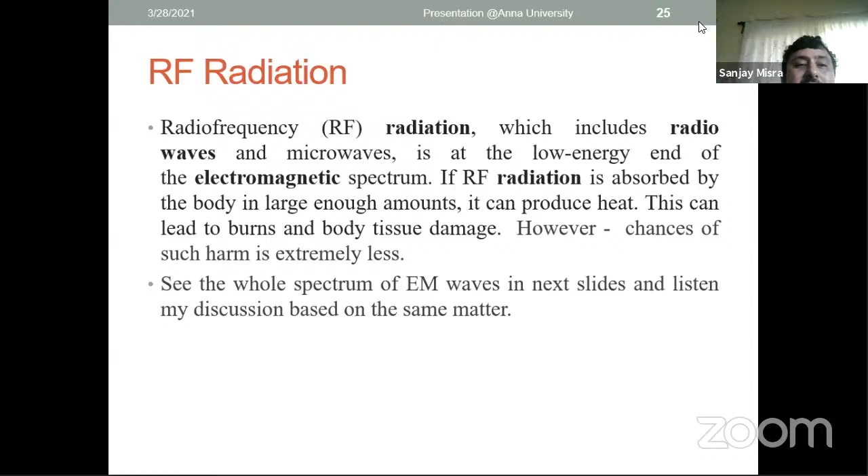How is it so? I'm going to prove it. See the whole spectrum of electromagnetic waves in the next slide. This is the electromagnetic spectrum. If you see, at the extreme end is the radio wave.

So we are talking about where 5G is, between radio and microwave. The wavelength in centimeters is going to get very small towards the microwave, which is about 1 centimeter. In fact, 5G works up to 10 millimeters. Infrared is 10 to the power minus 2, visible is 10 to the power minus 5.

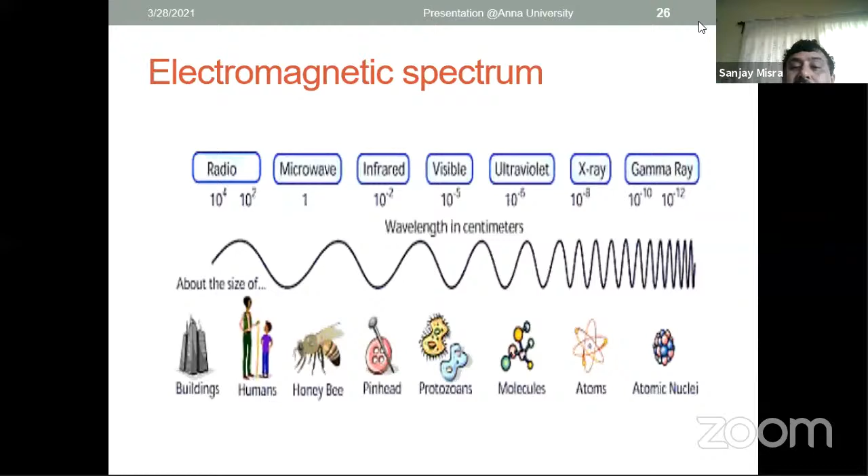Up to the microwave, these become more and more dangerous for health. Radio waves can cross buildings and humans. Microwaves are comparable to the size of a honeybee, about 1 centimeter. Infrared is like a pinhead, and then visible light corresponds to molecules, atoms, and atomic nuclei. Gamma rays are going further in that direction.

So there's a term: the non-ionizing nature of radio waves. The radio wave band used for mobile phone networks is non-ionizing, which means it lacks sufficient energy to break apart DNA and cause cellular damage. This is from a BBC report, 2019.

Higher up the electromagnetic spectrum, well beyond these frequencies, there are clear health risks from extended exposure. The sun's ultraviolet rays fall within the harmful category and can lead to skin cancer. This is a major point.

I'll show you some more slides and it will be clearer. Actually, the sun doesn't only produce infrared, but also visible light and ultraviolet light. Fusion in its core gives off high energy gamma rays. By the time they reach the surface, their frequencies mostly fall only within the infrared, visible, or ultraviolet spectrum.

During solar flares, the sun also emits X-rays. That's why it's highly recommended not to directly look at sunlight during a solar eclipse.

So how does this connect with 5G and radio waves? There is a strict advisory limit for exposure to even higher energy radiation levels, such as medical X-rays and gamma rays. When I was a child, my father used to come to the hospital and always tell me not to go to the X-ray room.

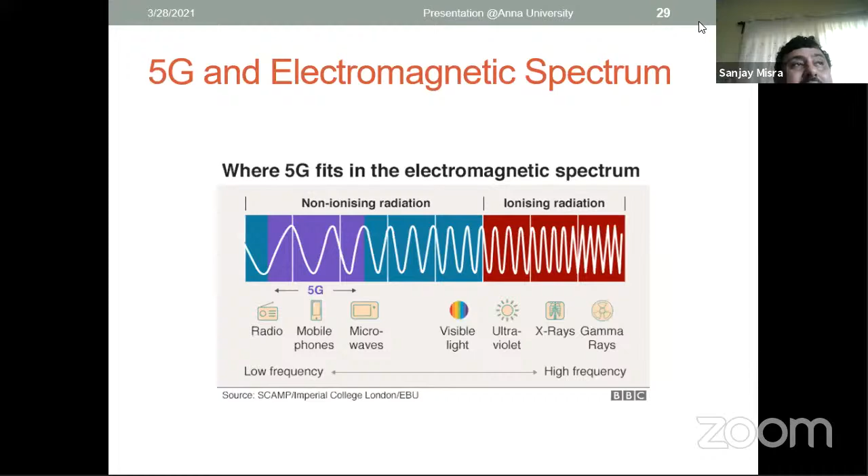From lower frequency to this frequency, you can see 5G is only from radio waves to microwaves. So it's very clear that 5G is in the non-ionizing radiation range. The point is that even sunlight emits up to X-rays, and sometimes gamma rays, and we are all facing sunlight every day in everyday life.

They are not harming. It is true that up until they reach the surface, this frequency, this strength is going to be very low, but still those contents are there.

5G utilizes millimeter wave technology, roughly 1 to 10 mm. These millimeter waves exist on an extremely high frequency, and are called millimeter waves because the wavelength ranges between 1 to 10 millimeters. 5G may also utilize ultra high frequency radio waves, which relate through the same wavelength and frequency formula, between 300 megahertz to 3 gigahertz.

Radio frequencies from navigational transmissions, AM, FM radio broadcast, television, cordless and mobile phones, microwave ovens, satellite uplinks, microwave relays, and radars all operate within the range of 3 kilohertz to 300 gigahertz. So theoretically, these frequencies do not carry enough energy to exert biological damage.

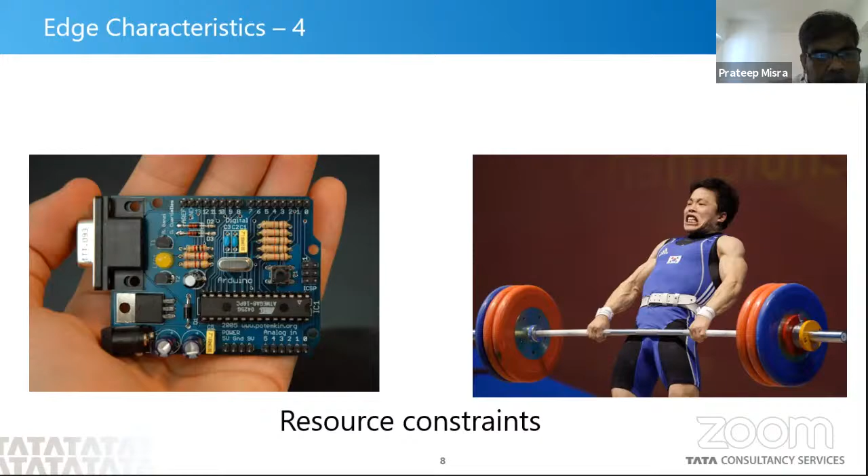So in the IoT edge, we really have certain goals. We need to meet latency requirements, because the applications demand it. There is a huge integration challenge. In fact, for companies like ours, when we work in IoT, one of the biggest challenges for us is to integrate systems - integrate different kinds of assets to other assets, as well as to other backend IT systems.

There is huge heterogeneity in terms of the networks, the structure of the data that is exchanged, the semantics of the data, the networking protocol itself. There is so much heterogeneity, we spend disproportionate amount of time in integration, and therefore standardization is very important.

We also need to optimize on data volume and network traffic, how much to exchange, whether to do more computation on the edge or to the cloud, or how much data to exchange. All of this has to be optimized based on the project objective.

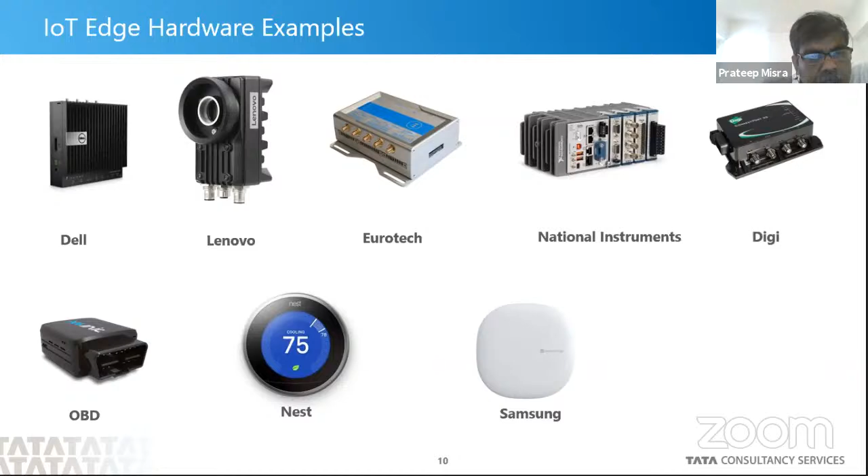Again, inside those IoT edge devices, you have these kind of boards, like this Arduino or this Raspberry Pi. These are examples, of course, for prototyping, but finally you make a production system out of these things. These days, IoT edge devices are also coming with specialized hardware accelerators for deep learning and machine learning. For example, this device from NVIDIA Jetson contains accelerators for machine learning inferencing and production, where models are executed on IoT edge devices.

So these are again some specialized devices for automotive, etc. These are all examples of the systems that are there inside those packaged things which we saw earlier.

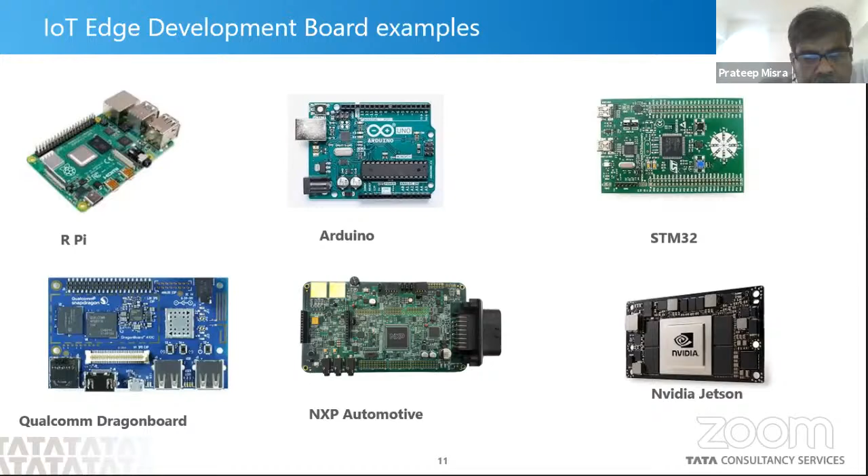So what does the IoT software stack look like? Of course they are computers - an IoT edge device is a computer. It will have its hardware, device drivers. Very important is to have the right kind of hardware abstraction or board support layer. In fact, whenever one of these boards comes out, we need to ensure that the hardware abstraction layer is there so that the device drivers can work.

And on top of this board support package or hardware abstraction layer, we have operating systems. These days it is extremely common to have Linux as an operating system. In fact, there are specialized operating systems for each domain - Linux Foundation, for example, is coming out with automotive grade Linux, which is specialized for automotive systems.

We can, of course, have other operating systems also. In microcontroller based systems, you can have more real-time operating systems like FreeRTOS, etc. Sometimes you don't have operating systems at all, but these days, more often than not, we have some kind of operating system. And then on top of that, we have these IoT edge platforms.

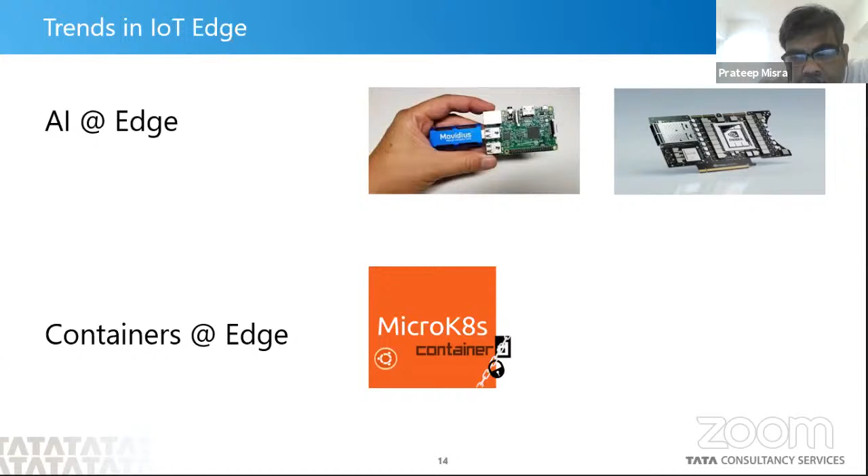Models are built in the cloud, those models are transmitted to the IoT edge devices, and then those AI models are executed at the edge. We have a deep focus on all aspects of this within TCS and TCUP Edge. The other thing is that containerized applications are being packaged as containers and run on container orchestration systems at the edge, things like micro Kubernetes, again a popular container for the edge. These are something we have also adopted.

The other thing happening is that there is a continuum, because of technologies like software-defined networks and service meshes, we can actually very seamlessly just focus on service development, whether it is an edge service, fog, or core. On the data and control plane part of the service mesh, these are all freely interchangeable, usable, and pluggable. So there's a continuous continuum between the edge, the fog, and the cloud. These are some of the trends, and there's a lot of work happening in all these areas in organizations like Linux Foundation and the Cloud Native Computing Foundation, etc. So everything is, the boundaries are actually getting blurred - the edge, fog, and core, etc.

So that was an introduction to IoT Edge in general. Very quickly, I'll also tell you about TCUP Edge. TCUP, or TCS Connected Universe Platform, is a complete enterprise-grade end-to-end IoT platform, and we provide various services required in developing IoT applications. We package them in the form we call microservices, and we expose them as application programming interfaces. Application developers use our APIs to develop these applications. We have a specialized platform for the edge called TCUP Edge, which is designed ground up considering the edge characteristics.

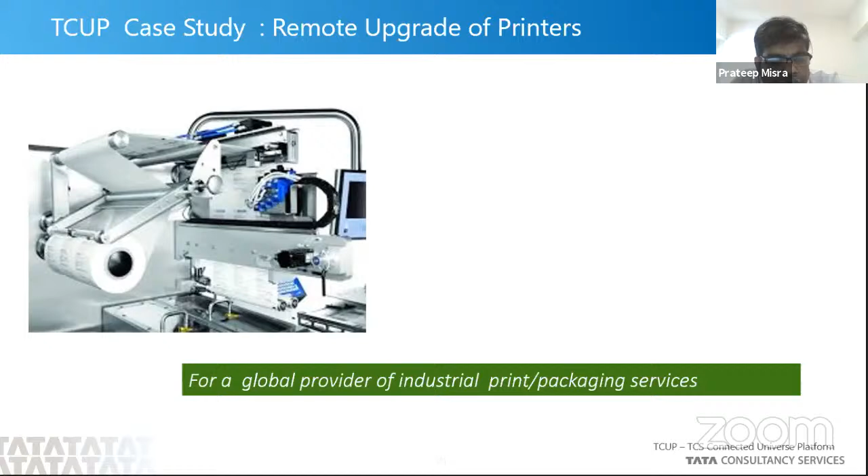In smart factory applications, this involves collecting data from control systems at the edge, running some data pre-processing at the edge, and then sending that to the cloud for cloud-related processing. This was done in a factory of a precision engineering component company.

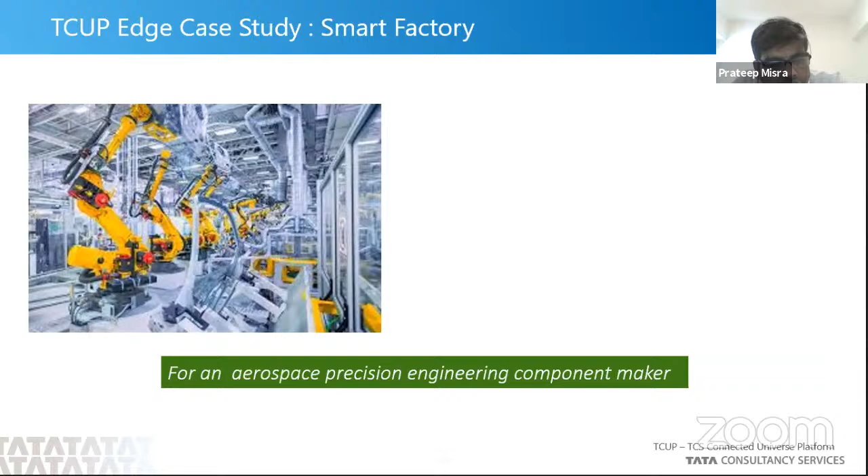Similarly, for large steel manufacturing, raw material inspection is done using image processing techniques where we try to detect impurities in the incoming material. Whenever those impurities are detected, we generate alerts.

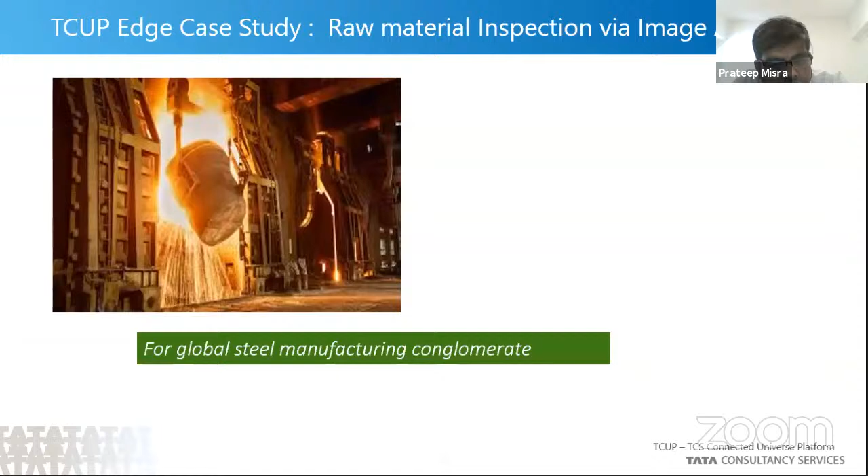Another area where we now have a big focus is laboratory IoT. Most pharma, chemicals, and formulations companies have significant investments in labs, whether product engineering labs or production/manufacturing labs. There are many very expensive, high-end assets in these labs that need to be monitored like any other IoT asset tracking application, but these assets also generate a lot of data.

So integrating all these systems, processing and harmonizing the data, transporting it into the cloud, and maintaining the data lake on the cloud side - these are the kinds of engagements very much in demand these days. We see a huge interest in the industry for laboratory IoT, and our edge platform is being used by many customers for laboratory applications. I'll end my talk here.

I hope I was able to give you a flavor of what's happening in the industry and what kind of engagements and technologies we are involved in. I hope I finished in time, and maybe I have a few minutes for question and answers.

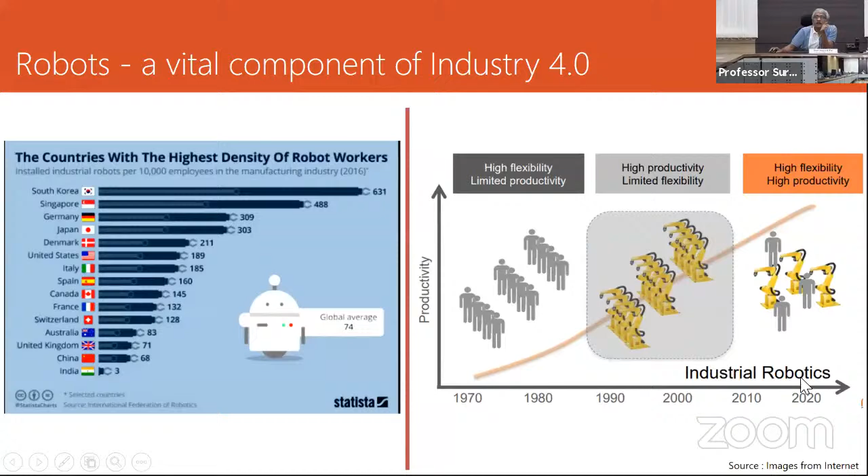As of now, in most cases wherever robotics are used, it is either in manual mode or a highly programmed situation, meaning it's programmed to do a repetitive job. So it is not accustomed to tackle dynamic situations, meaning no intelligence is involved. Even though there is no human intervention, the intelligence is very limited to the activity or program mandated to the robot, even though it produces very high productivity.

But because of these dynamic situations, we need to understand how these robots in place in industry can be collaborative with human beings, so that a flexible system can come up. Robots can operate in dynamic situations so that we get a smart product. So even though robots are in place, our actual vision under Industry 4.0 or Industrial Internet of Things is that the collaborative nature of robots must be there in the software, meaning robot-human interaction has to be there to bring flexibility.

I'm giving an example of this work: how can a robot avoid a dynamic obstacle. If a robot is asked to pick up a job from one place and move it to another place depending on industrial need, and during its path some obstacle comes up, how can that be solved? People are working on that, and in fact my group is also working in this field.

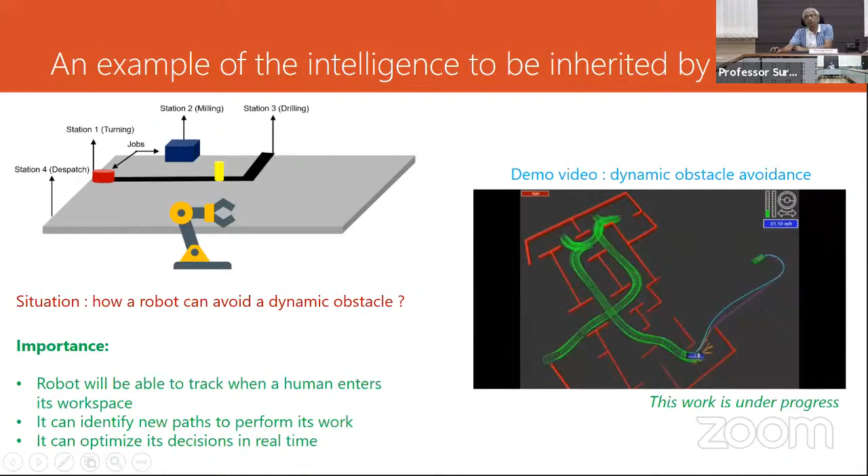These sort of situations would be very much needed when we would like to place robots to work in dynamic situations, or where robots have to work with human beings. If the operator comes up, the robot has to find out whether the operator is obstructing its path or not. If it is, then it needs to find an optimized, shortest route. This is an example which we are planning to implement in the robotic facility, and we have successfully done the simulation.

So IoT applications in manufacturing, we understand mainly in four aspects. If you look carefully into these four aspects, you will get to know that the majority of manufacturing applications that are really concerning us today fall into these four categories.

The first is real-time product quality analysis. Dr. Misra has told us that image processing plays an important role in identifying product quality on the shop floor. Similarly, we need to understand the health of the equipment producing a job, and how long it can serve. So the digital version of health, which we call the digital twin, has to be in place so that we can know how long the machine will work. Not only that, if a machine is working and suffering from some problem, then the operating parameters also need to be optimized depending on the instant health of the machine itself, meaning the dynamic nature comes into play.

There are a lot of applications where remote operations come into picture, like the operator sitting at one place and the machine at another. The operator cannot go beside the machine for some reason. So how can the machine be operated, while ensuring safety for both the operator and the machine? All these factors are to be studied through implementation of each needed module of Industry 4.0 that I have mentioned.

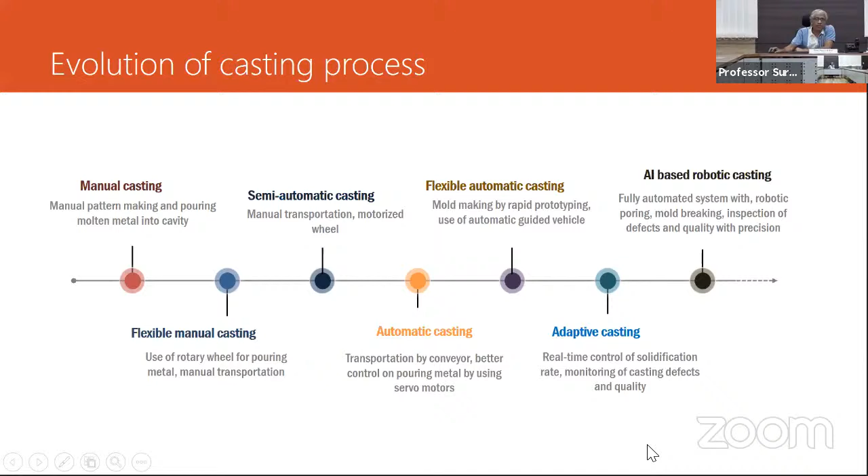So I'm giving an example, like in the cladding process. If you can measure the glow of the molten pool and capture this image, then the characteristics of that image can be very easily used to monitor the cladding quality.

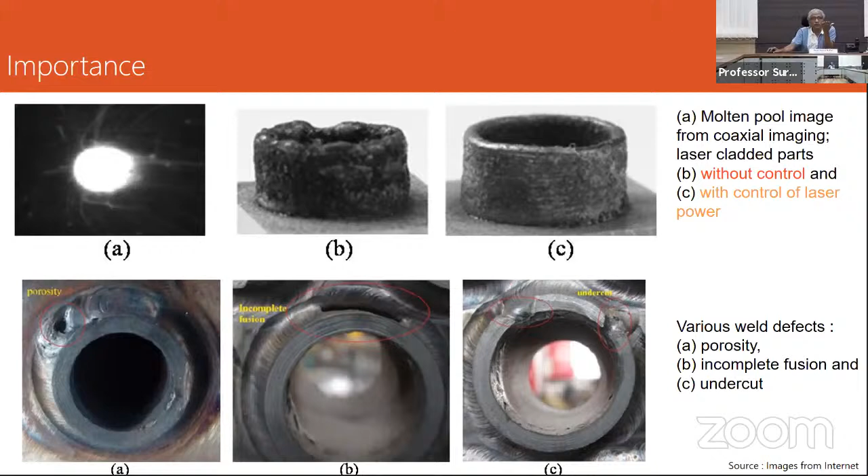As Dr. Misra has rightly mentioned, image processing has huge, immense applications, and still we need to travel a long distance to ultimately come up with the product or software which can be readily used in the industry.

Another example is the machine vision systems for quality inspections. The previous one is real-time process control, and this is to avoid rejection of the product at the quality stage. For most industries, it's very difficult to judge each and every product on the shop floor in real time.

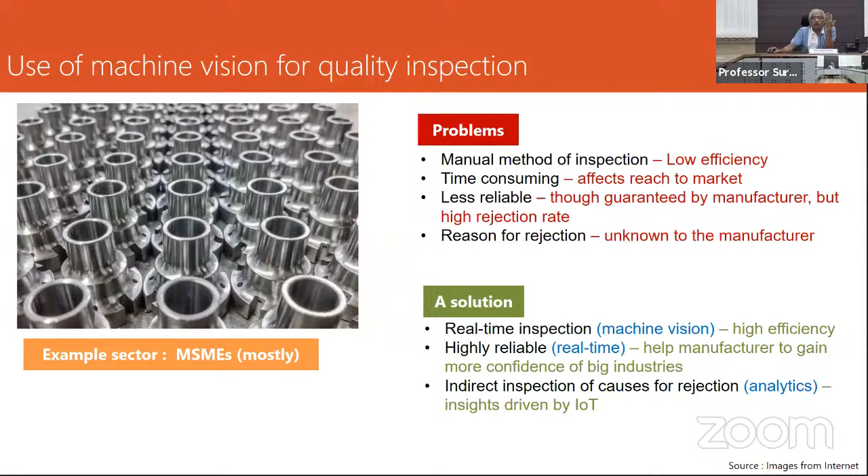So here we have come up with image processing based solutions which can be very easily implemented for real-time inspections, so that it can avoid the rejection of the product and also ensure the quality.

I'm giving quite a few examples to show how potential the image processing technique is for quality inspections. The circuit board or motherboard has a lot of components of different numbers, sizes and types. If something happens, it's very difficult for a person, even for experts, to actually pinpoint the fault.

Similarly, image processing can be used for automobiles, for example to check the distance between the two electrodes in the spark plug.

This is an example we have done in the case of wheel beam inspections for automobiles. We captured the image using a low-cost webcam, thinking of small and medium enterprise manufacturing applications, and then applied AI-based techniques.

So after several iterations, we came up with enhanced quality, which is almost at par with the image taken by a good quality camera. The lower image is the one taken by the good quality camera.

So if you see this, you can see how much potential artificial intelligence has to augment image quality, which then helps in processing, and finally gives the product quality with 99% accuracy.

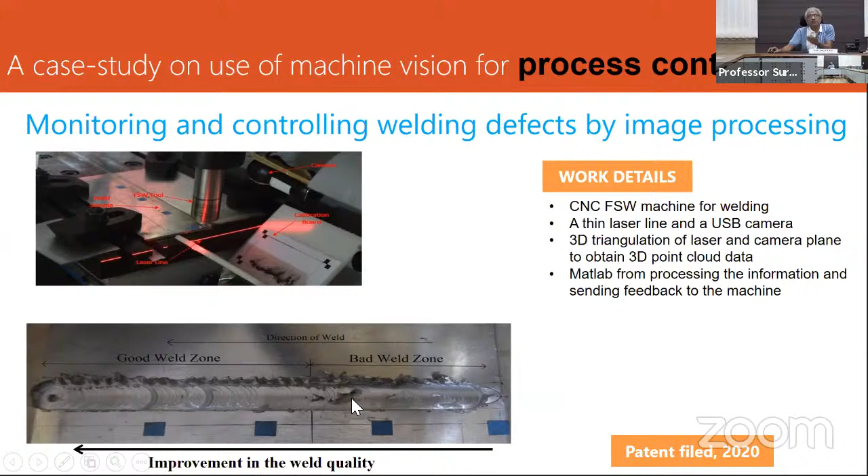So we captured that image by camera and then processed that image in real time, and we came up with a defect detection method. This has also been filed as a patent.

I'm giving an example of work done with Tata Consultancy Services with the team of Dr. Pal Mishra. Here what we have done is used friction stir welding, a solid state joining process.

In this case, we have engaged a large number of sensors to collect information about the process, and we process that sensor data in an edge device.

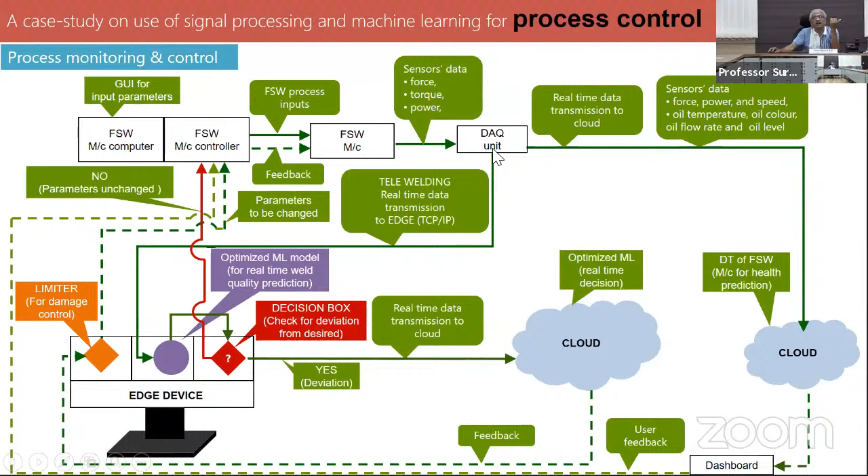If everything is fine, the process goes as it is. If something deviates, the signal is getting deviated, we send it to the cloud for taking a decision through machine learning, so that feedback goes to the machine to change its parameters, and ultimately a defect-free weld should come out.

Maybe in one or two minutes, if you wind up. So this is the example of defect-free weld quality detection, for which we have also filed a patent with Tata Consultancy Services. Similarly, for predictive maintenance and health monitoring.

In a furnace, this has been applied at Tata Metaliks. Our faculty colleagues have done this in collaboration with Dr. Sinha and other researchers of the Tata Group.

They have come up with furnace health monitoring, the different motors used in the furnace, what is the level of vibration, and how it is real-time affecting process quality. That has also been monitored and used at Tata Metaliks for its acceptance.

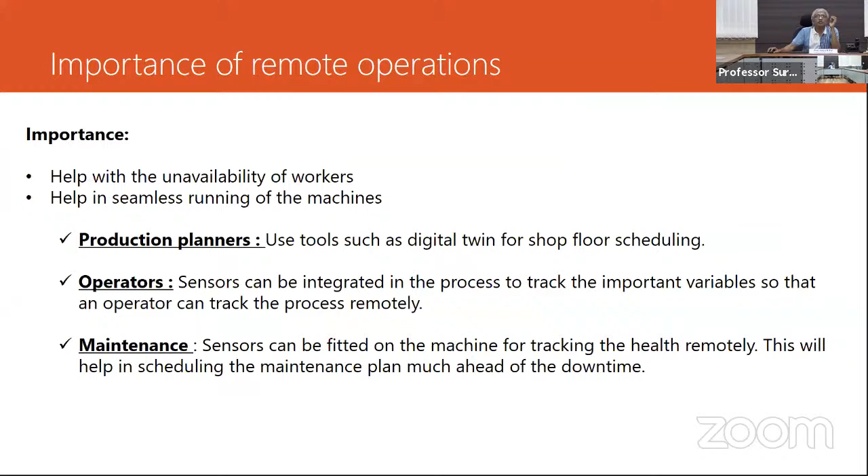Similarly, as I mentioned, there are a lot of applications in manufacturing where remote operations are involved. Digital twin is one such application where the health of different components of machines has to be monitored remotely. We gather signals from different components, analyze those signals in real time, and come up with a predictive plan.

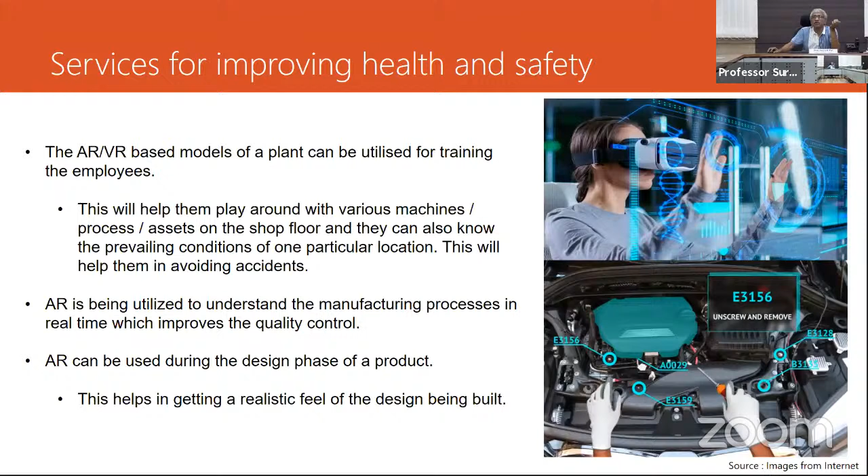Similarly, for safety analysis, as I mentioned, safety is not only for machine-to-machine interactions but also for operators present on the shop floor. So augmented reality and virtual reality are coming in a big way for service sectors and so on.

As I'd like to conclude this initial portion of the talk, the futuristic application that manufacturing is aiming for is not only remote application. It is also about how the thoughts of the operator can be analyzed remotely, so those thoughts can be used as an input signal to robots for performing defect-free production.

So out of all these things I have mentioned, when we talk about the Internet of Things, things means devices. Different types of devices would be needed on the shop floor to come up with a complete Industry 4.0 solution. With machine-to-machine interaction, a large number of data would need to be gathered, captured, and analyzed.

For that we must have faster communication, so deployment of 5G or higher versions of the network as they come out has to be deployed for better, lower latency, more security, and so on. So thank you.

I'd like to conclude that Industry 4.0 is no more an option. It has become a mandate, and industry must make use of these concepts. The sooner the better. Thank you.

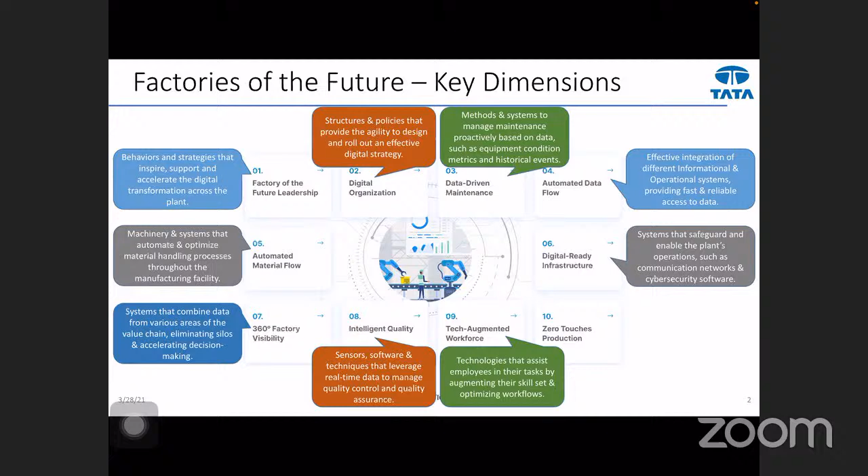And finally, you have to have the hardware infrastructure which will allow you to minimize human intervention, and that is basically very much the need of the hour because of the COVID situation.

So based on that description of what the factories of the future would look like, the World Economic Forum started in 2019 to identify factories across the globe through the Fourth Industrial Revolution initiative, and evaluated them against certain criteria, including digital technology penetration, level of scale, level of impact made, and workforce training infrastructure.

Now there are 69 of them, but this slide shows about 44 from last year. This March they have included a few more lighthouses, bringing it to 69. Initially it started with 25, then 44.

You'll be pleased to hear that 3 Tata companies, all from the Tata Steel Group, are lighthouse factories. Two from India: Tata Steel Kalinganagar became a lighthouse factory last year, and this year in March, Tata Steel Jamshedpur became a lighthouse factory. And the first in the group, the original lighthouse factory, was Tata Steel Europe.

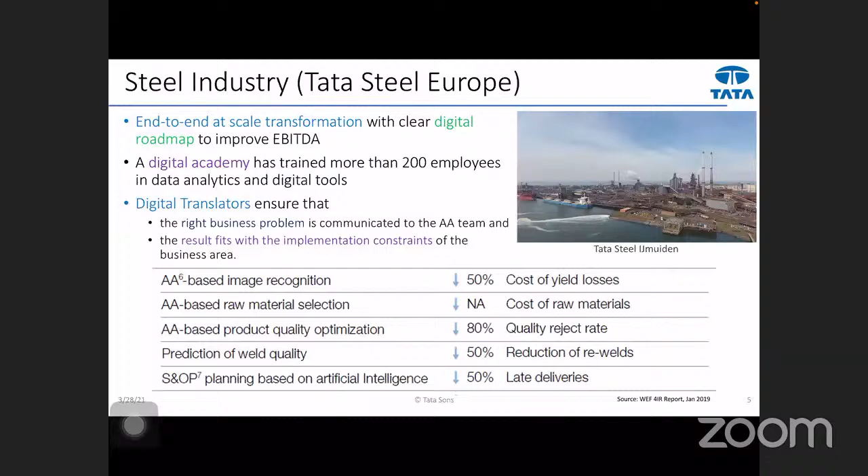If you look at Kalinganagar, a similar kind of thing - they also looked at it as a greenfield project, meaning it was starting from scratch. Kalinganagar management wanted to ensure that from the word go, the factory would be set up with complete digital maturity in mind, and wanted to make sure the factory reached full production for the first phase in the minimum record time anticipated.

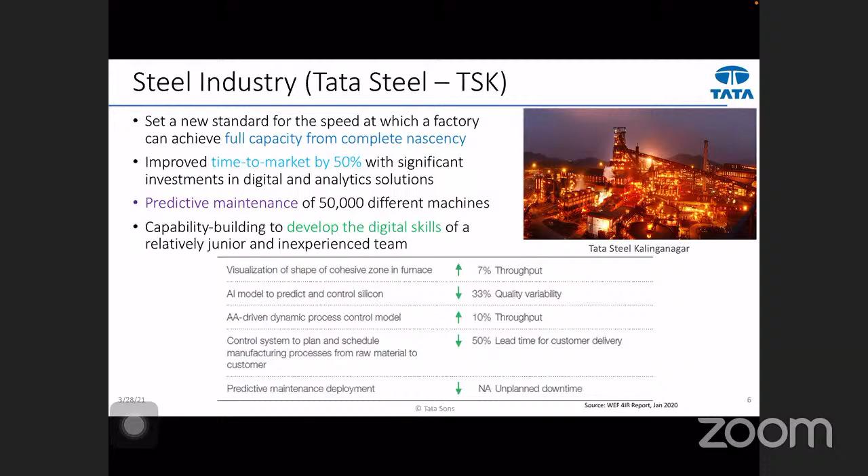Purnendu, sorry to interrupt, maybe another minute or so. Yeah, so this is the last slide.

The vision and roadmap is very important for the digital transformation journey. You need to identify the business KPIs which will create big impact, then do value assessment on these KPIs to see which are the low hanging fruit with early wins that can convince management to move ahead early. Then you have to create, rather than proof of concept, proof of value pilots.

Proof of concept is no longer desired; you have to show the value from your prototypes and pilots. And scaling the use case means at one location at least 50 to 100 use cases must have been deployed, implemented and looked at. So this is what I had to present.

I'll stop sharing now, and I hope I'm not overrunning. No, thank you Purnendu, it was a very insightful presentation, and I'm sure the audience has quite a few questions. We'll come back to that.

Before that, I will take another 10 minutes to present what I think you've already seen in parts. Pradeep gave a complete spectrum of IoT application, Professor Shurjopal gave a nice context of how it's applied in manufacturing, and Purnendu brought the industry view. So what I'll end with, since there's quite a bit of faculty and students here and I'm from industrial research, is a view of the practical research problems that the world should work on and we should work on. I'll give a glimpse of that in the next 10 minutes before we open this up for questions and answers.

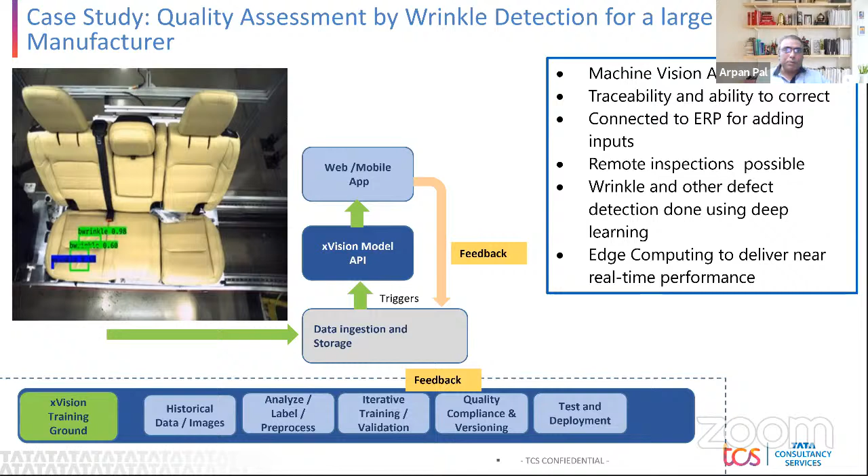The third part is what we call robust and practical AI. The other problem is we assume that labeled data is already available, but in reality there is a cost to data annotation, it's not easy to get labeled data. So crowdsourcing of data annotation, training with small data, unsupervised or imitation ways - these are the future research challenges without which you cannot practically deploy.

And how do we augment? There is a lot of knowledge in the factory with the operators and others. How do we augment this knowledge into the deep learning models? And how do we use pre-trained models and transfer learning to actually do scale deployment? Because you cannot go and tell every factory that I will collect data for 6 months to learn my model. It's not acceptable, so how do you do it?

That means every 100 times, 2 times, 5 times, or 1 time it will fail. So the challenge is, how do we trust machines that are not predictable? We are not used to that. I don't think if I told you your car, every 100 times, once or twice, when you press the accelerator it will brake and vice versa, you would use that car. You will not trust that machine. So how do we do that? There's a big problem here.